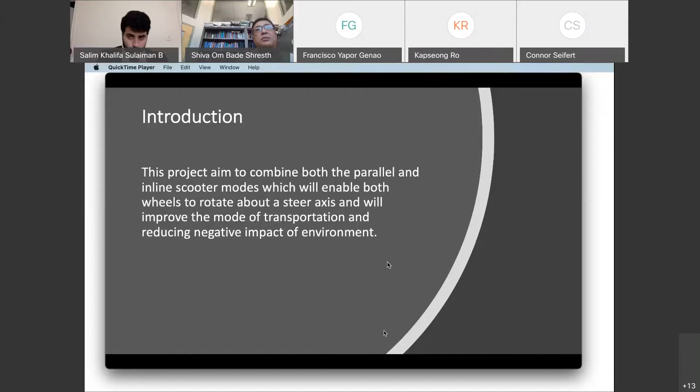After identification of the gap, modes of transportation were reinvestigated. After multiple iterations, an electric cycle was shortlisted. This project aimed to combine both the parallel and inline scooter modes, which will enable both wheels to rotate about a steer axis and will improve the mode of transportation, reducing negative impact of environment.

Electrical scooters are changing the mode of transportation in cities and university campuses. This is being warmly welcomed as a low price solution for small journeys. Although electric scooters are being utilized in more than hundreds of US cities alone, little is recognized about electric scooters.

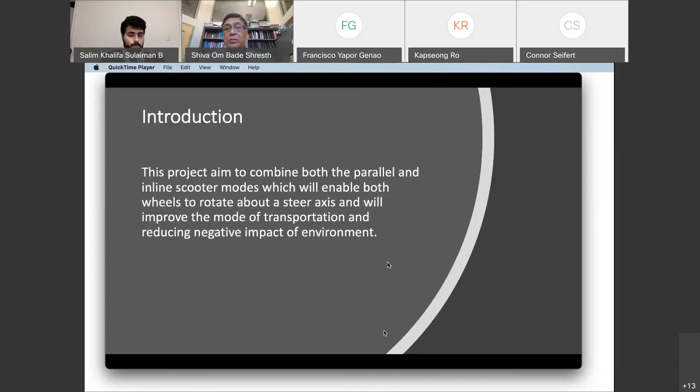In our project, for making any project successful, strategic planning is a fundamental step. The project was subdivided into the following main steps: initial research, 3D CAD modeling, and finally finite element analysis. Each step has its own importance and order of priority, in order to keep the project on schedule and completed appropriately within the time.

The main focus of this project was to design and do FEA analysis of the structure. After the initial research, 3D modeling of the system using Solidworks 2020 was started to make the structure lightweight; 1-inch square aluminum 1060 alloy was selected.

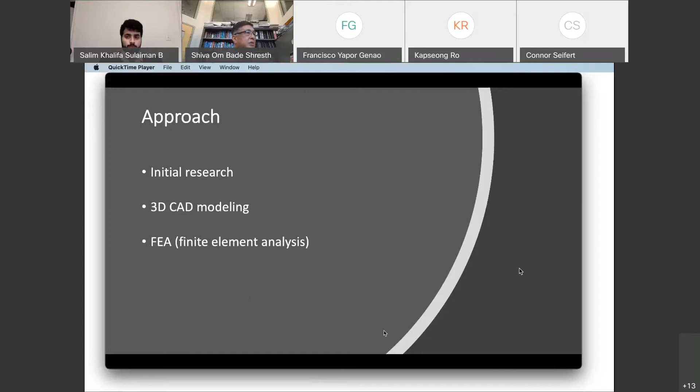At the start, a lot of research was conducted on various types of scooters. A number of designs were revealed and their pros and cons studied. From the number of designs, a combination of parallel and inline was selected due to its advantages over the rest. Focused research was further conducted to make the design simple, efficient, eco-friendly, and safe for use.

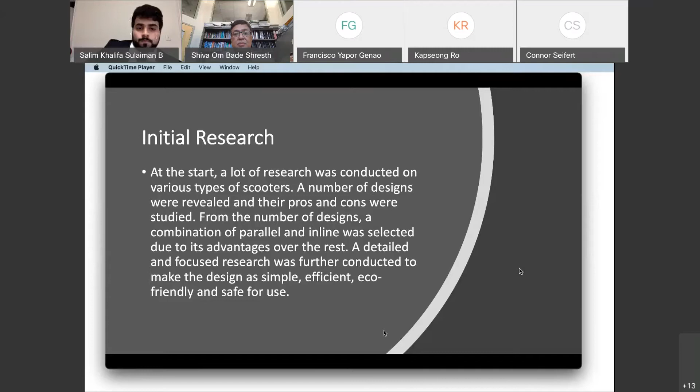Now I'll shift to Rida to talk about 3D modeling. The most distinctive means of making a 3D model is to take a simple object and extend it into a shape that can be refined and detailed.

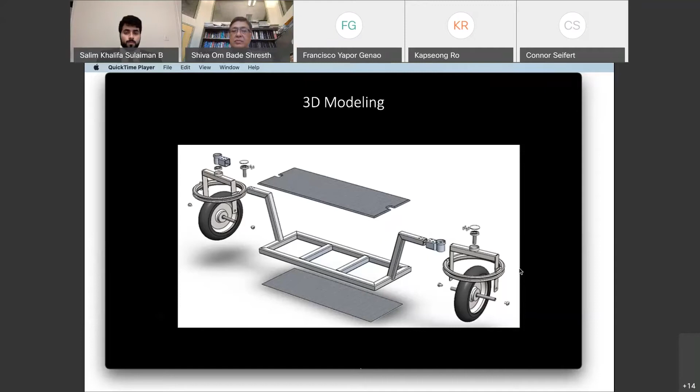In this project, we used Solidworks software for 3D modeling. Each part was designed as per customer requirements, as you can see in this picture. Although there are various methods of creating a certain part, Weldment modeling was mostly utilized to create structural elements. Here's a picture of the full structure.

A custom weldment feature was defined with a 1-inch square cross section. We designed the frame out of aluminum 1060 tubing cross section. We used aluminum because it is a strong material with high modulus of elasticity, which is approximately 69 gigapascals.

The body was created out of carbon fiber panels. We used carbon fiber because it is a rigid, strong, brittle, and lightweight material.

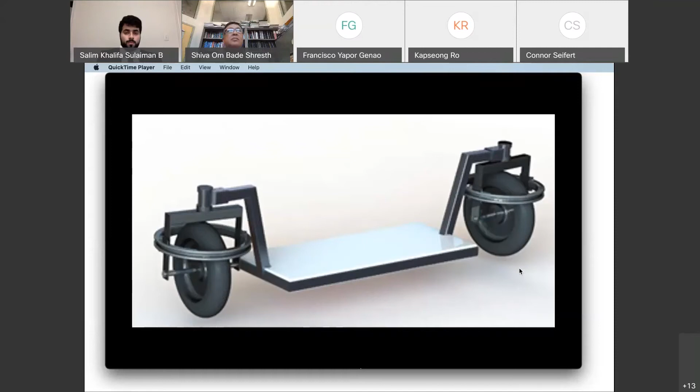Finite element analysis: simulation can be incredibly supportive in designing any project and ensures that the design will function as planned, and this analysis minimizes the chance of failure.

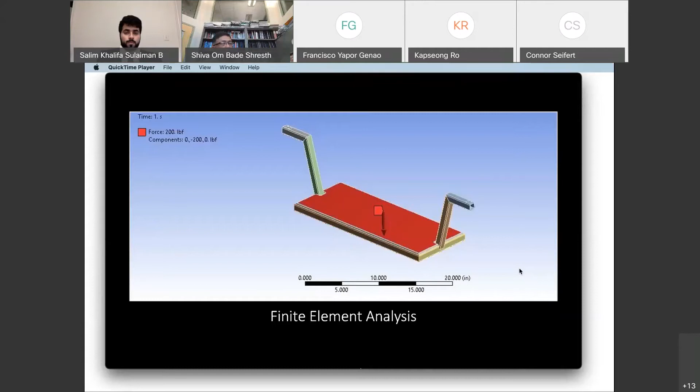Although there are a variety of simulation software, ANSYS was utilized for FEA. The main parameters that the team was concerned with were the maximum stress, deflection, and factor of safety.

Therefore, the Solidworks model was redesigned twice during this project. For the first and second designs, ANSYS showed high stresses and deflections at some areas. As you can see in the final design, the vehicle is safe under a force of 200 pounds with a safety factor of 1.5. The maximum deflection is calculated to be 0.328 inch under that load, which is an acceptable amount of movement for the type of project being simulated.

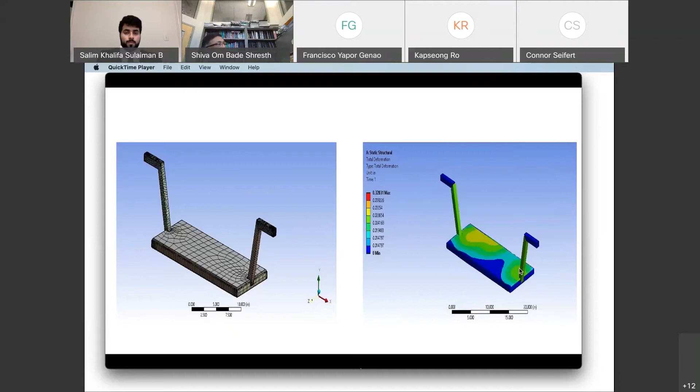Code of ethics: fundamental principles and canons of ethics were exercised while designing this project. Number 1: using high safety factors to ensure there is no fracture, so there are no injuries. Number 2: the project was designed via applying advanced engineering and professional knowledge. Number 3: the product was made of strong materials to make sure all health and safety parameters are met.

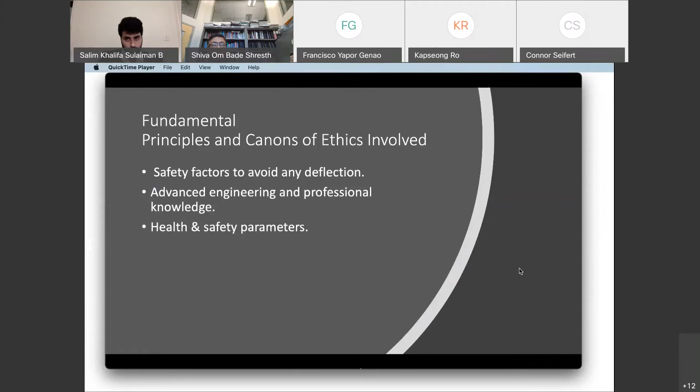This is Hussein. The design advantage of the prototype: after design and finite element analysis are completed for the project, it is necessary to compare what advantages this design has over other designs. It is significant that the group designed something that would not only look professional, but also had to be effective for its intended purpose.

Major advantages achieved are as follows: 1. Reduced weight due to use of aluminum alloy instead of ferrous-based alloys, while strength is also not compromised. 2. It is evident from the above finite element analysis simulation that the factor of safety is between 3.2 and 9, which makes the design quite reliable and safe.

3. Use of an electric motor makes this design eco-friendly and efficient. 4. The system has the advantages of both basic types of scooters, parallel and inline systems. 5. The system is designed to be affordable to most people, which makes this prototype quite inexpensive, whereas the cost of the first model is between $2,000 and $2,500.

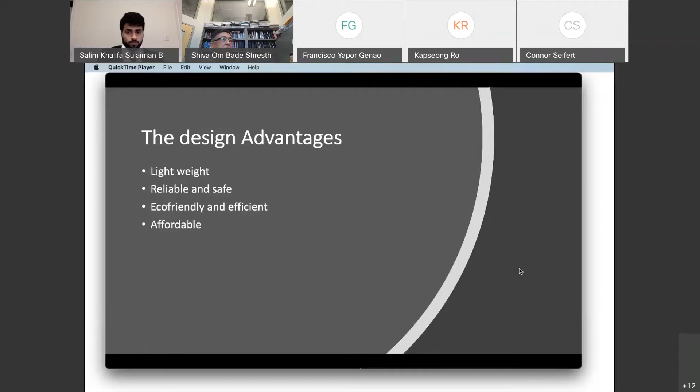I'm going to talk about future improvements. Every new design creates opportunity for future improvements, and this design is not different. This project is designed while keeping this factor clearly in mind.

One of the main future developments can be use of solar power for the functioning of the electrical components, including motors. Another thing that could be done to help improve the design would be further weight reduction through optimization of cross-section thicknesses. This is due to the fact that factor of safety is much higher in some areas.

So from nodal analysis, thicknesses can be reduced to match, and overall factor of safety around 3 to 4.

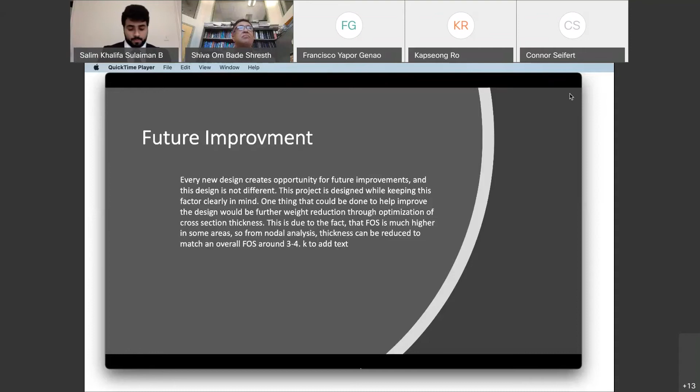Finally, through extensive research, this design was optimized while solving various issues discussed in the abstract and introduction paragraphs. This research comprised of understanding of main functions and combinations of different types of cycles. This research gave us the start-up kick of beginning the 3D CAD modeling.

This research also familiarized us with the importance of finite element analysis simulation, where actual physical testing could be difficult, time-taking, or even expensive. All design challenges were catered for and the product provides economy, efficiency, and safety. Furthermore, during all stages of design, engineering and professional ethics were exercised in true spirit.

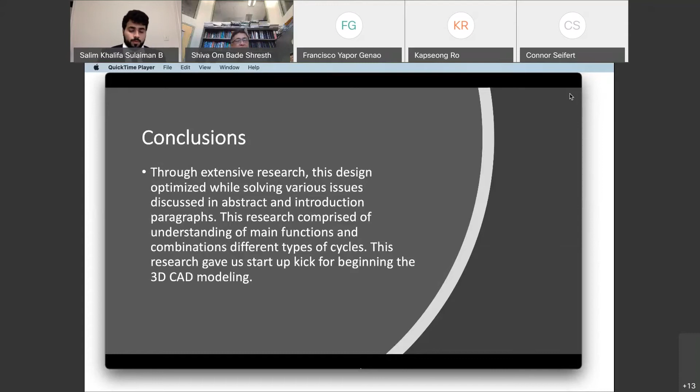I'm going to talk about acknowledgements.

Successful completion of this project could not have been possible without the help of several people along the way. We would like to thoroughly thank the advisor, Dr. Merati, for comprehensive guidance in the project. We'd also like to thank all, including humanity, for valuable resources of research and the web.

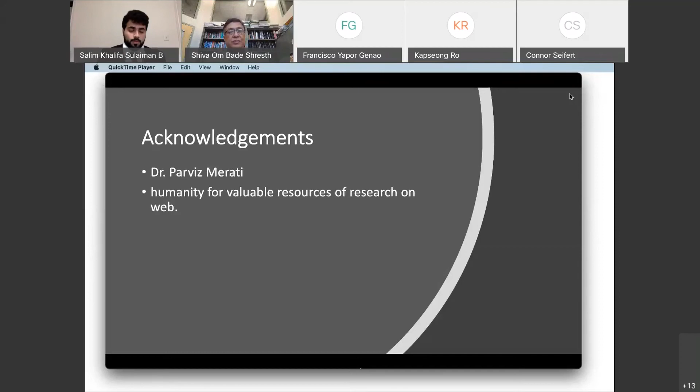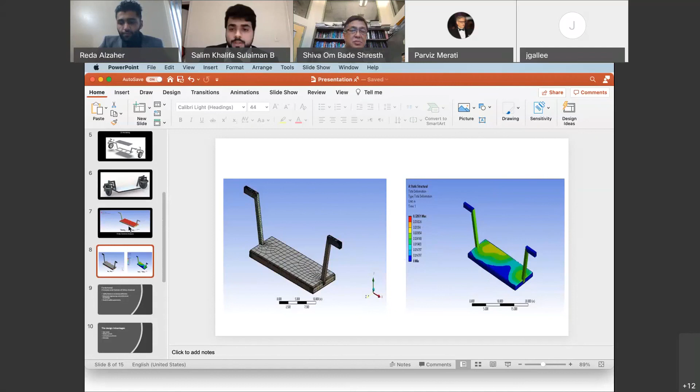Yeah, what are the boundary conditions here? So we are looking for the deflection, for the deformation. So if you see the deformation here, the maximum is 0.328, and for this one the force that we apply is 200 lb, 200 pounds. Yeah, that's what we have here.

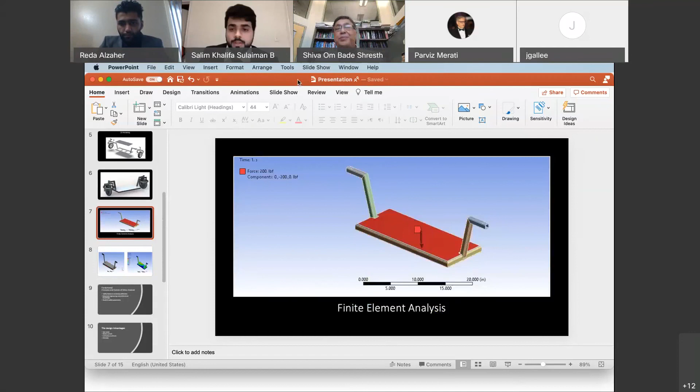Is that correct, that boundary condition? Yes. Yes, okay.